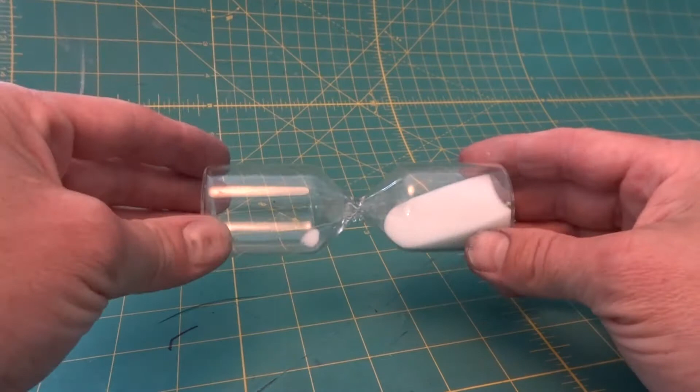We were traveling through America and we came across this strip mall that had an import store. We went inside. My wife picked up a couple things, and I found this hourglass. Always wanted one of those brass hourglass jobbies, so I picked it up and it sat on my desk for about 6 months, till today. So here we go. Let's build one.

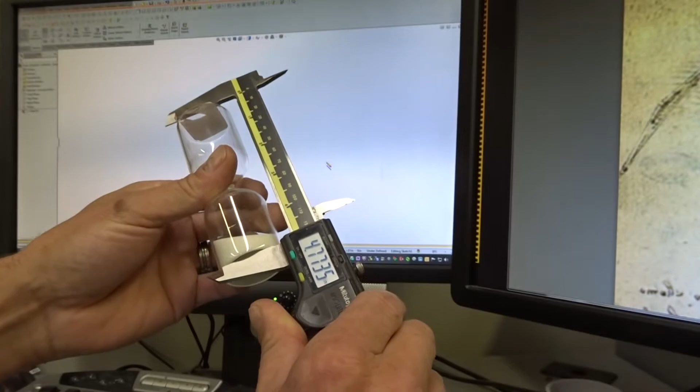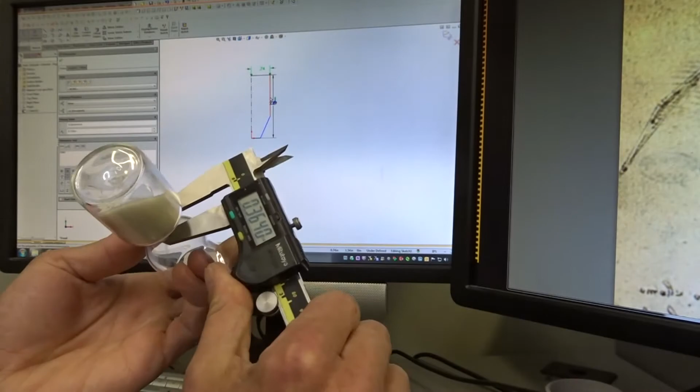We'll measure the diameter at just under 1 3/4. We're just drawing half the profile, so we'll set that radius, and then for cosmetics, we'll finish off the smallest diameter and the length of the straight sides. And throw in a couple of fillets. Then we'll mirror the whole thing over.

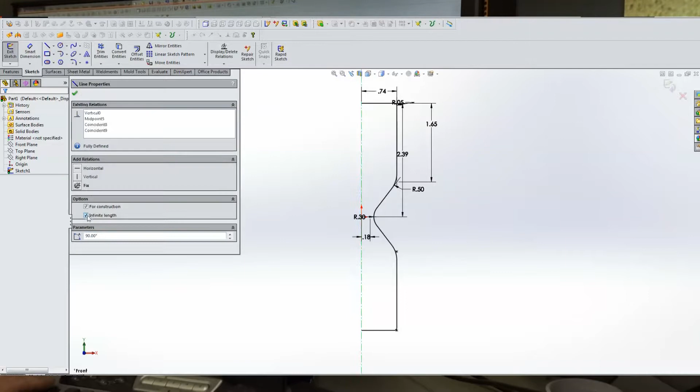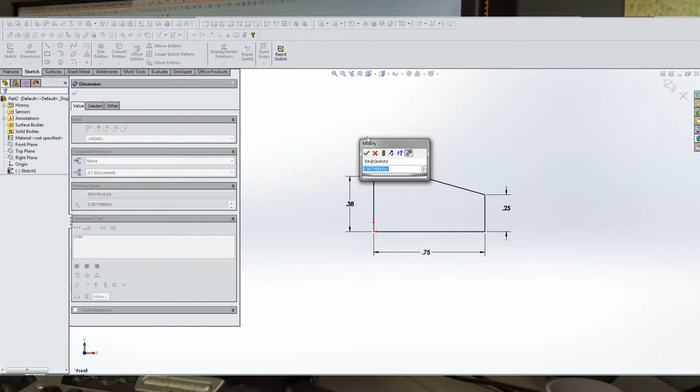Radius the inside. Set the overall length. We'll select the material. We'll call it glass. Save it out. Start on the base. Again, we'll just draw half the profile and revolve it. Just start with a rough sketch and then add in the dimensions, revolve it around. We're adding the counterbore in.

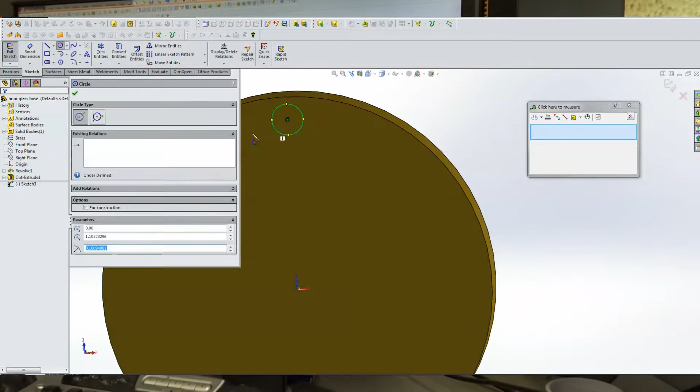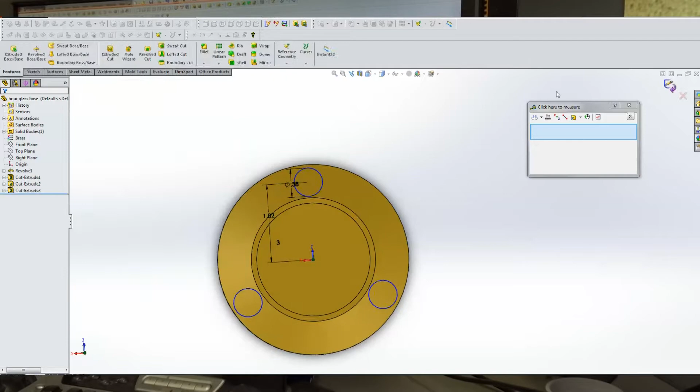Here we're drawing the 3 counterbores for the spindles. Rotate them 3 times, and then offset extrude cut them through, 100th thou off the bottom. Then we'll draw in the through holes, 3/16. It was a little close to the edge, so we moved it.

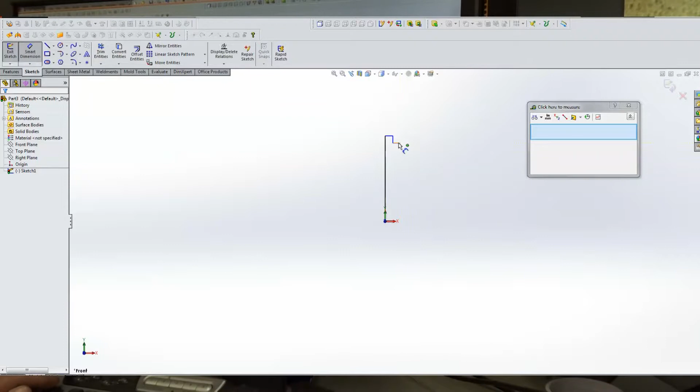Save that and bring in the other piece to start an assembly. Top and the bottom. Line up the holes concentric. And then we can measure the overall length that we'll need for our spindles. This will be another revolve, drawing just half the profile.

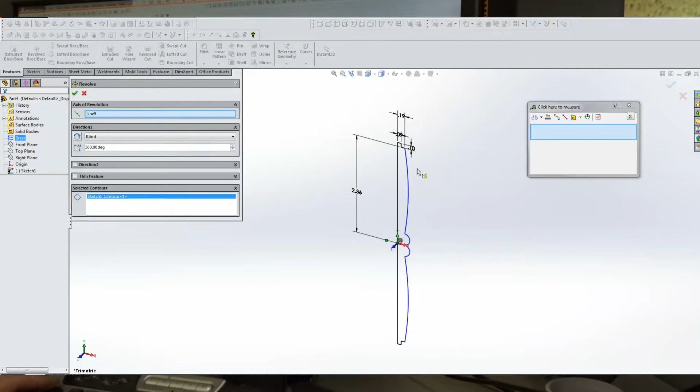Just playing around, trying to come up with something that looks nice, and then mirror it over again. Add the 100 thou spigots on the end. Clean up a couple of issues. Save that out and bring that into our assembly. We mate it to the concentrics. We could see it was hitting the glass, and now we're just tightening up those radiuses. Looks okay there.

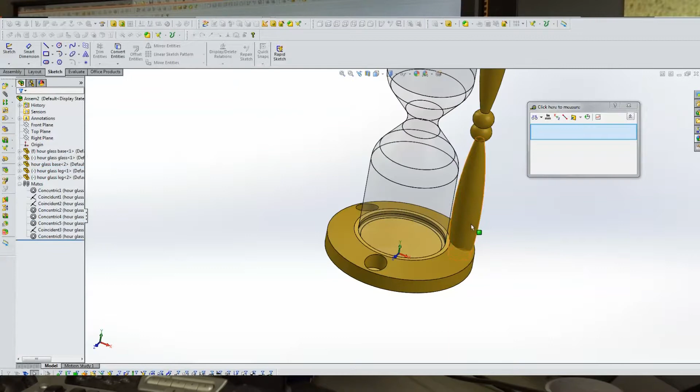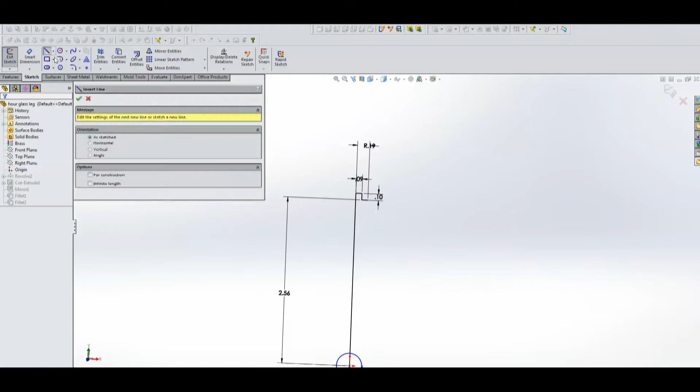And just to make the model complete, we'll copy out 2 more, place them. I didn't really like the look of these double bubble in the middle here, so we're going to change it to just 1 radius in the middle, and straight sides are tapered.

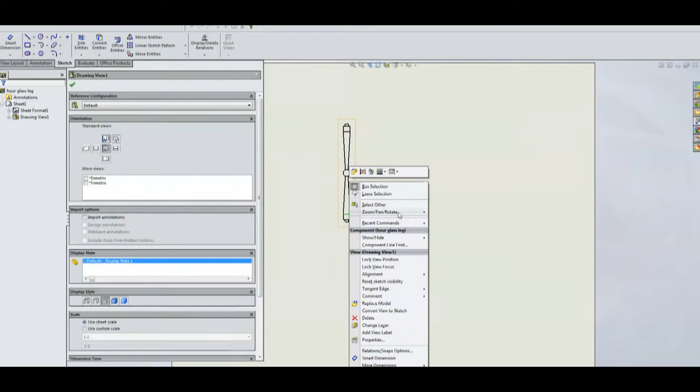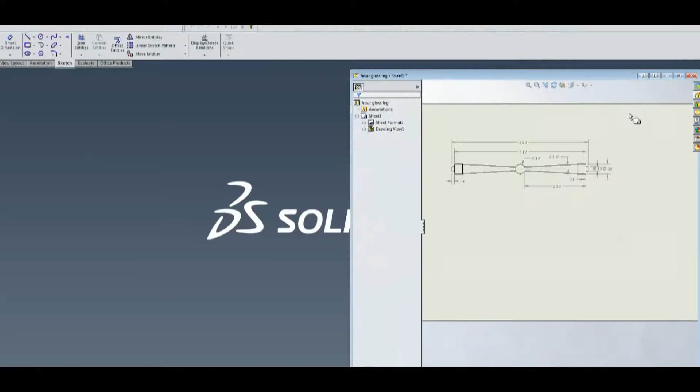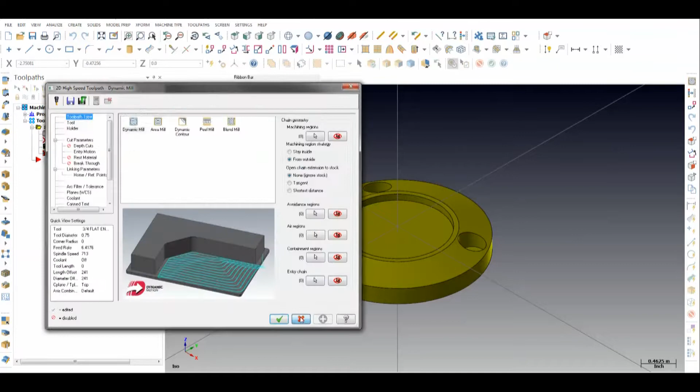Just pull a couple of dimensions off a drawing for the manual turning. And we'll bring in the base too, just to part off a couple of these to length. We bring the base into the CAM software, position it, put some wireframe geometry on all the edges.

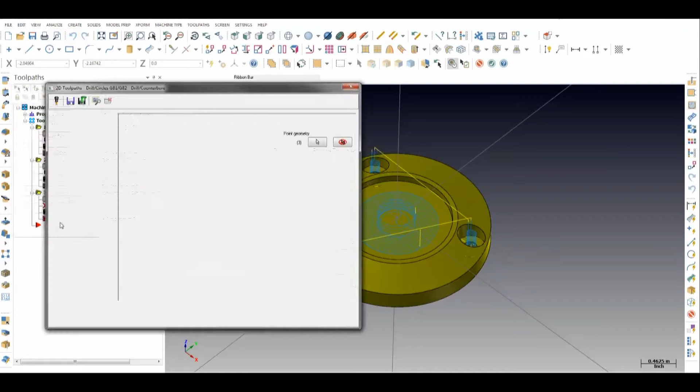Setting up a counterboring operation for the middle. It ramps in nicely and then spirals out to the outside. And we'll do the 3 counterbore holes, ramp them down with a 1/4" end mill. Now we're going to drill out the 3/16 holes, spot them first. Set up the stock for the simulation, check it out. Looks like it's doing what we want.

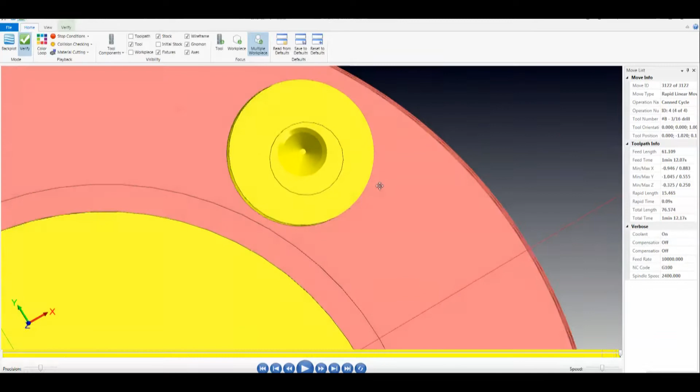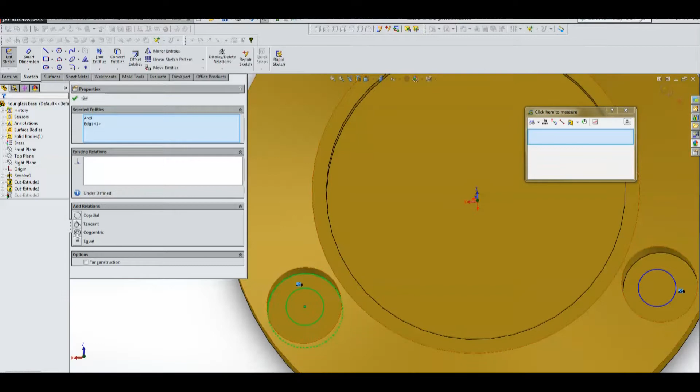That hole's a little out. Figure out what's going on there. Still got a problem. So we'll go back here. When we put those holes in, they weren't concentric with the other ones. We'll fix that. Bring it back into the CAM software. Reposition it.

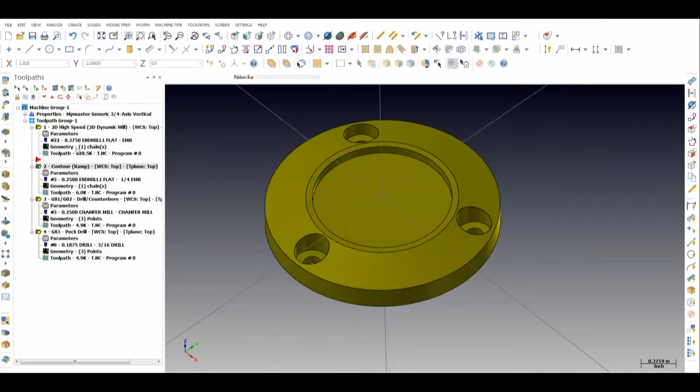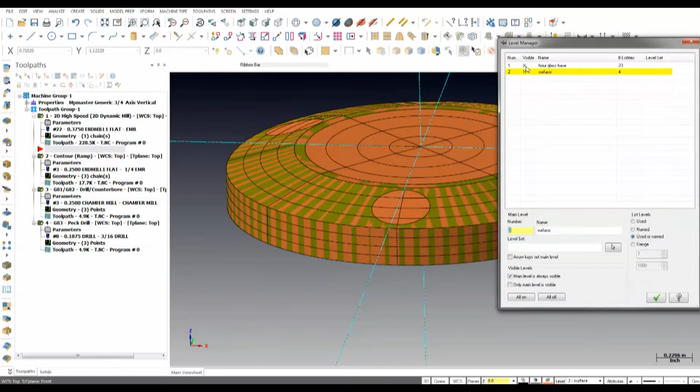And we still have our operations, so we'll just reassign the new geometry. Regenerate those. Run the simulation. Click OK. We'll generate some code. Now we're going to put a 3D path around the tapered face. Here we're creating a surface geometry to drive our tool.

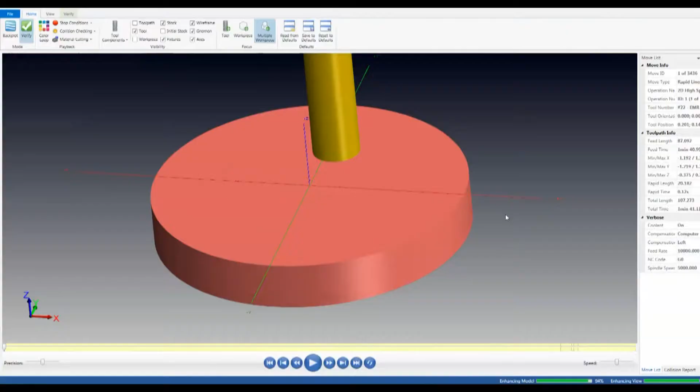It's cleaner than going over all the holes. I was on the wrong plane, so we'll do it again vertically. That looks the direction we want. Pick the ball mill for that. Now we're doing a rough step over with a coarse spiral so we can leave some grooves in it just for a design. By changing the scallop height, we can tighten up those grooves. And that looks good.

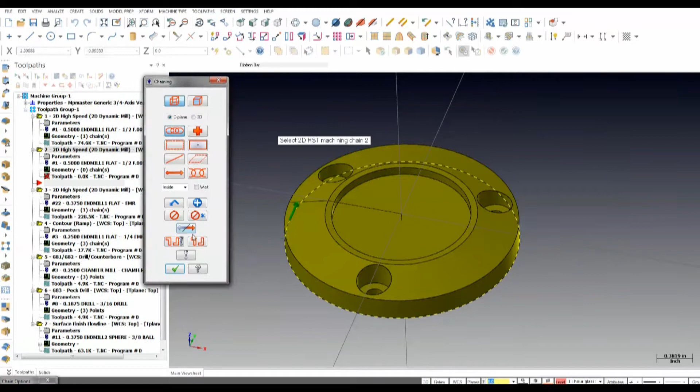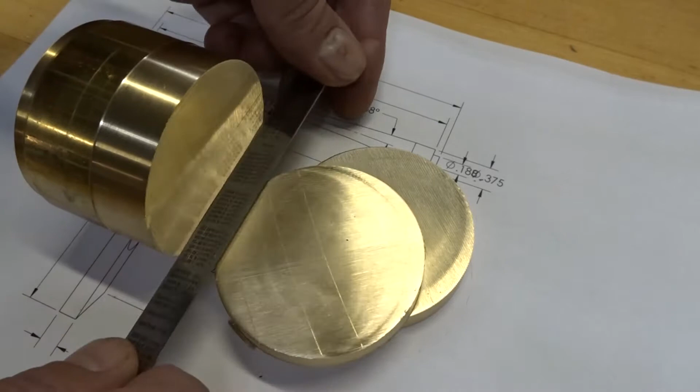Oh, we didn't have a facing operation, so that'll skim the top off. Here I've got laying out the brass stock. Got my carbide 6-inch scale there. Just lop off a couple pieces. Real nice saw there, it just cuts right through.

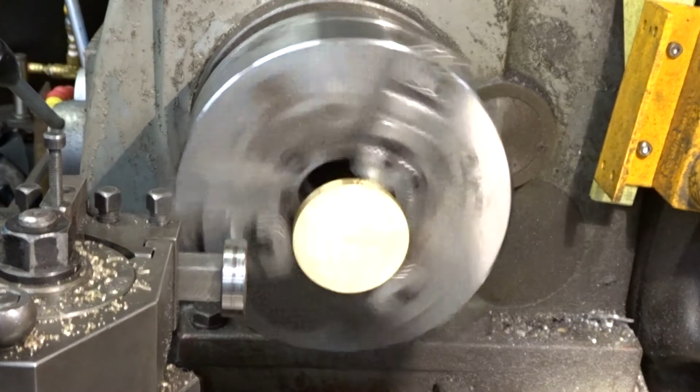Chuck up the blank. Just snug it up. Here we've got a bearing on a stick. We'll just roll that up against the face, knock it into true. Lock it down and skim the face.

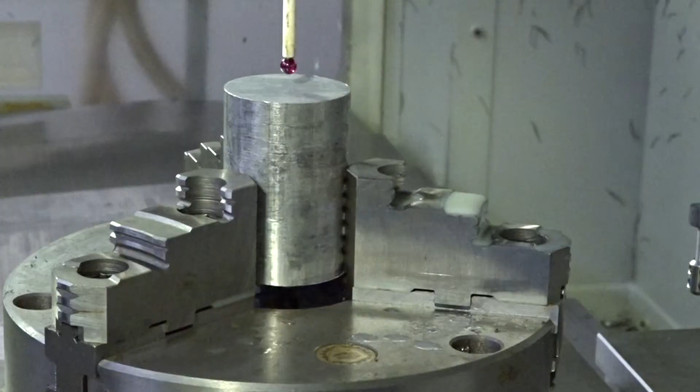We just knock off the corner with a 45-degree chamfer tool. Here we've got just a slug in the chuck in the vertical milling machine. We're picking up the center of the chuck, and we'll pick up the face of the chuck, and then in the offsets we'll add our parallel thickness and the thickness of the finished part.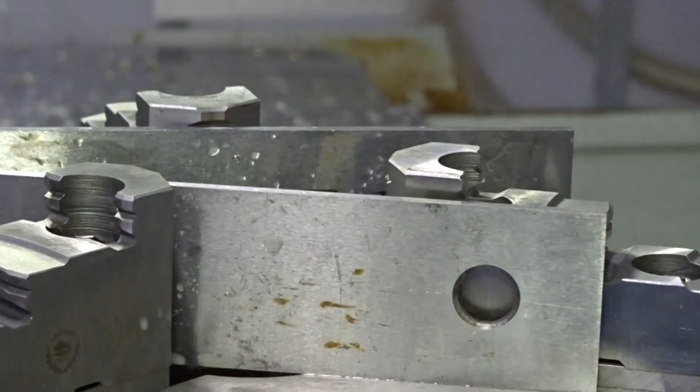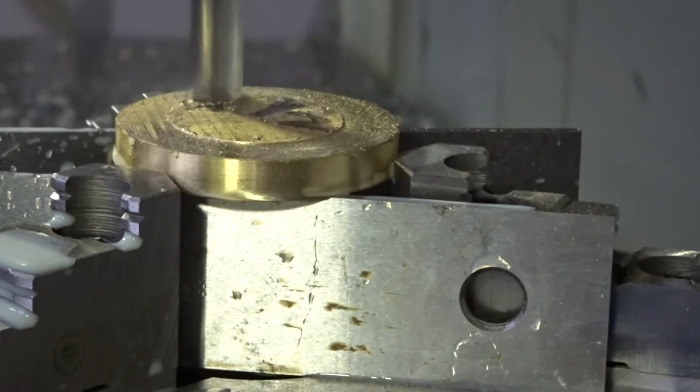We've got our blank set up, just tap it in, make sure the parallels are snug, not moving around. This is sped up a little bit, but normally we'd have the coolant running; for the video, we left it off. This is just a facing pass. So we'll use a 3/8 mill to ramp to depth, and then spiral out to clean up our counterbore.

We'll ramp down with a 1/4 inch to do our counterbore. And then spot drill the 3 locations. We're just spotting it with the drill. We didn't go through it, didn't want to hit the parallels or anything. We'll finish it on this drill. Finish: this is a 3/8 ball mill. Again, it's just spiraling around to the inside, leaving a spiral groove in it.

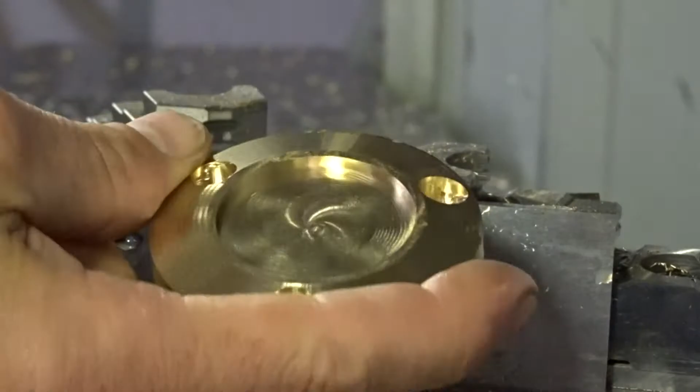There she is. Check the fit. Couldn't find my 1/8 to 1/4 inch split collet adapter for my mounted points, so I'm just turning one down on the collet lathe. A couple thou over a 1/4, so we just skim the outside, and we'll drill it out to 1/8 on the inside.

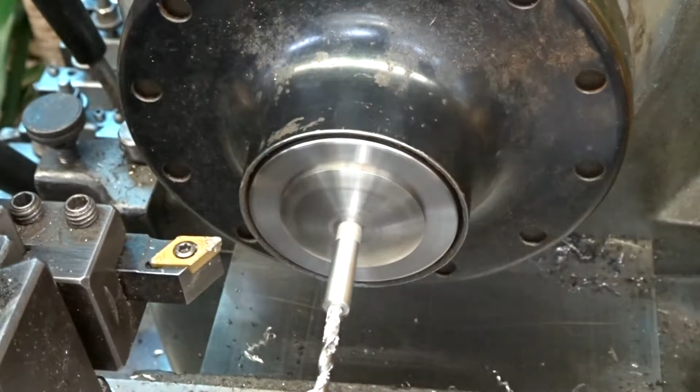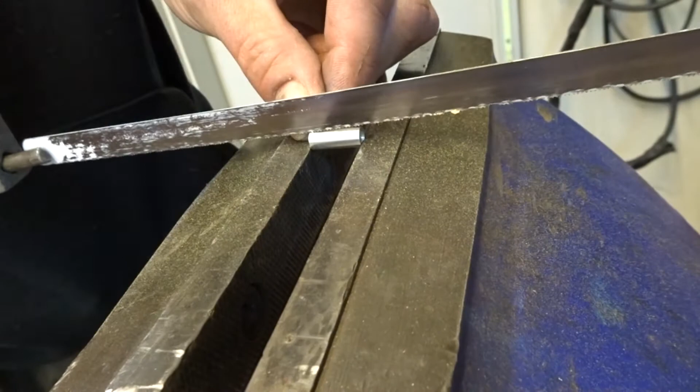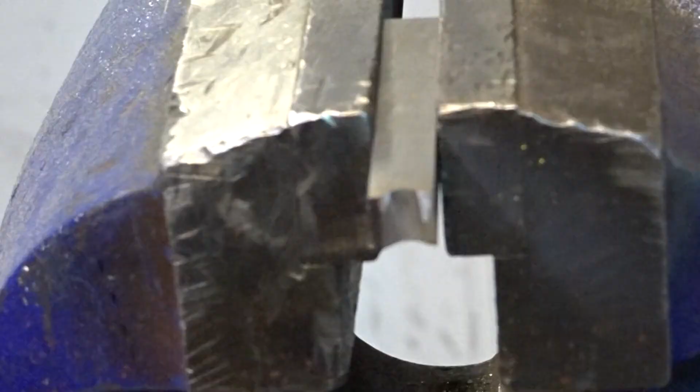Got a little lazy with the oil there, but we'll just part it off. Take it over to the vise, split it down the middle. Clean out the burrs. And that'll mount in this die grinder so we can make our profiling tool, with a real nice mounted point, not like the one that comes with your sister's Dremel. It's close to 3/8, same as the high-speed steel we're shaping. I roughed it out in the pedestal grinder, and then we're just cleaning it up with the mounted points.

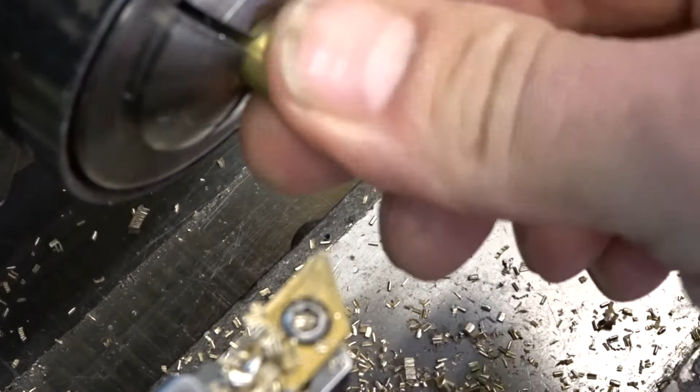Got our 3/8 brass, we're just touching off the end and parting them to length. Flip them around, clean up the other end to finished length. Just measuring, touching the tool, and taking off the 10th thou that I needed. So 3/16 spigot, 100 thou long. Both ends. And the center drill for live center.

Now we're plunging in with our form tool. End up with about 180 thou thickness. Swing our compound over 3 degrees. We're just plunging into the minor diameter, and then pulling it out with the compound by hand, just winding it back. Take it all in one shot.

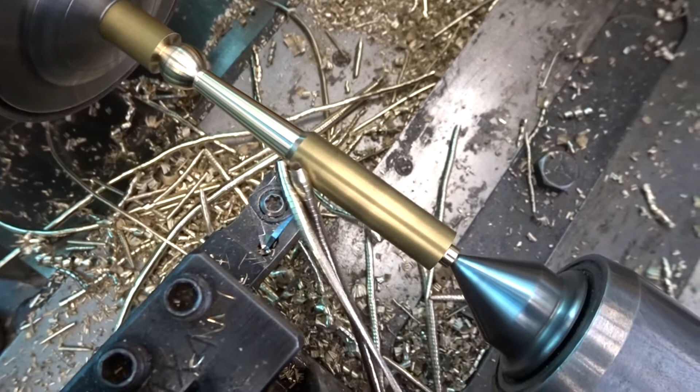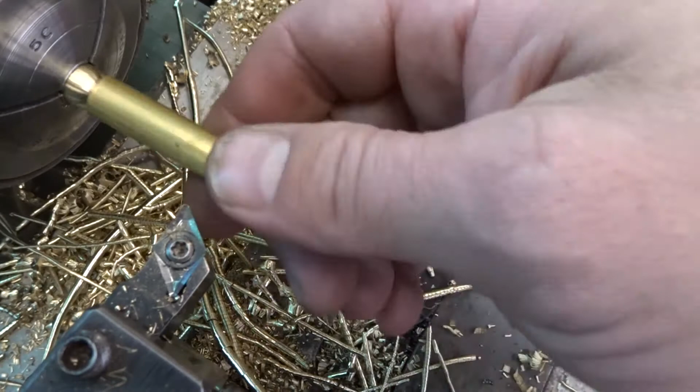Now we're going to do the other side. It's sticking out a bit too far. It's protesting. We can hear the chatter like crazy, but the camera's running, so let's just go for it. Oh dear. So let's choke up on it, bring the center back in, and we'll try that again.

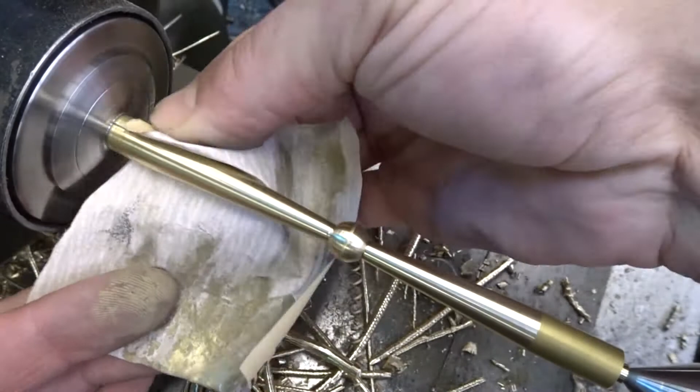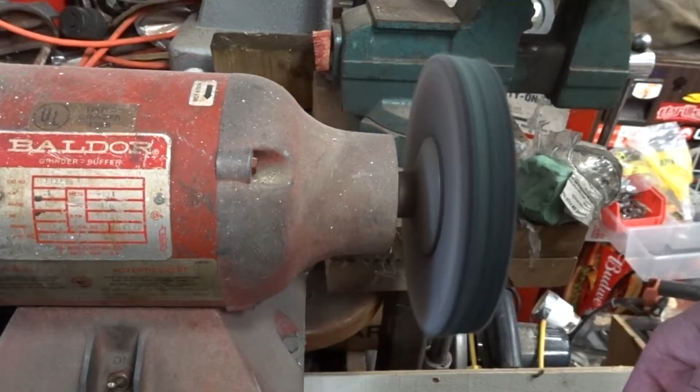Same thing, just plunge in and wind her back, cut it with the back side of the tool. These are nice polished inserts meant for aluminum and non-ferrous. There she is. We'll just give her a quick once over with a 400. Then with a 600. And a little Scotch-Brite with some paste. Here we're just going to give the base a little buff.

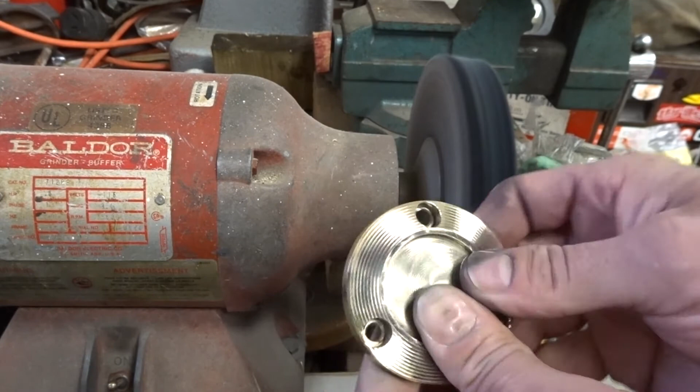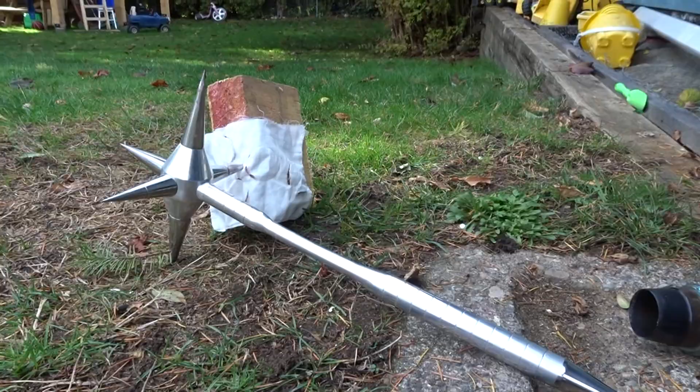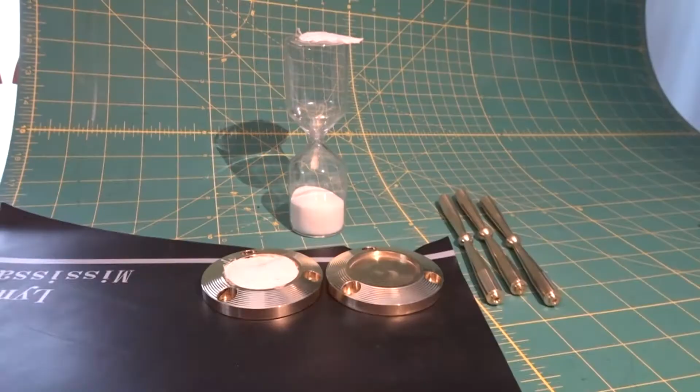Oh yeah, here I wanted to cut out a piece of cloth for the bottom, but it just did not want to cut with that punch, so forget it. Just cut it out, old-fashioned way. Had some rubber, just put down some double-sided tape and thought I'd stick this rubber on the bottom of the base, but I think I'll take it off and find some white felt for it.

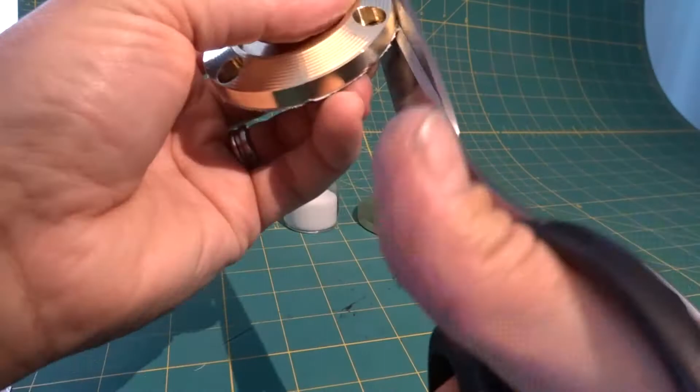We've got some slip fit retaining compound to put it all together.

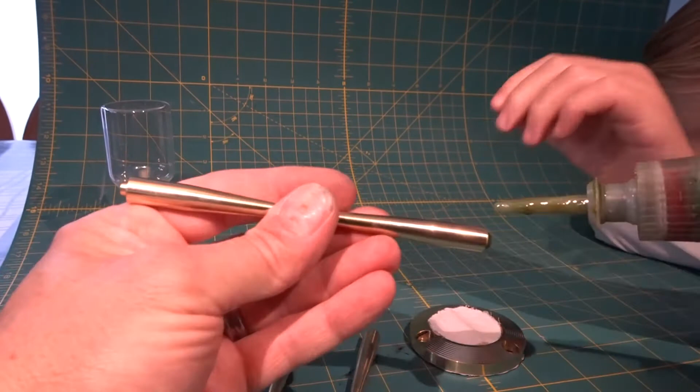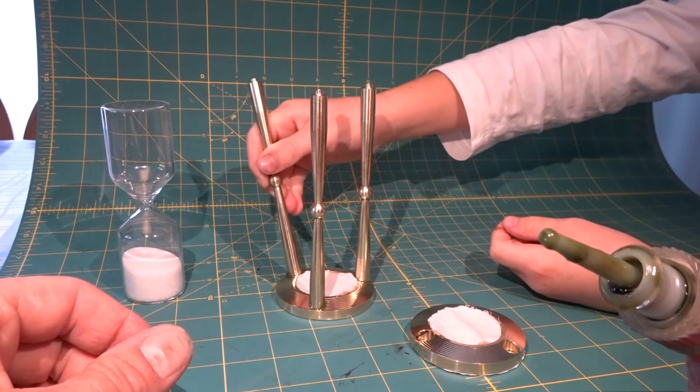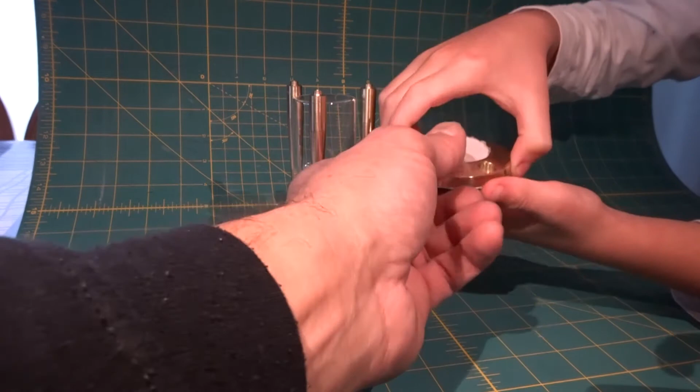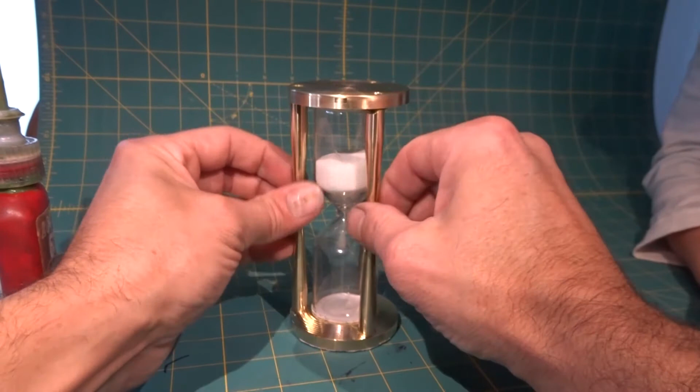No, wrong one. Is that a white one? White. Here, you put that one in. No, in this. Get it straight. Okay, put the glass in the middle. Oh, that's cool. Not yet. Put the paper on top. Is this kind of like the thing where it holds the quicksand? Yeah. That's fine for this part. Wow. Now you're going to take a picture of it, right? Ooh. Cool.

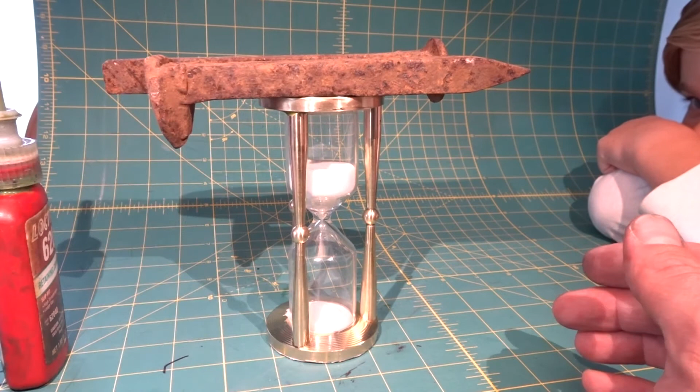Just let that set for a bit. So there it is. Altogether, design and build was about 4 hours. Nice little piece. Keep it by the desk. When somebody's yapping too much, you just flip her over and say that's all you got.